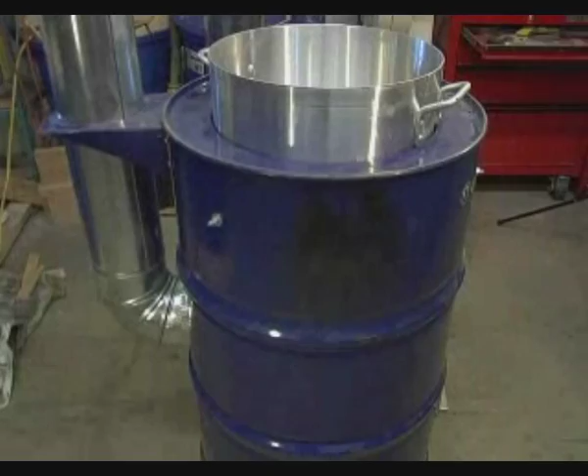This video demonstrates the steps for building an institutional barrel stove. The exact measurements needed for the construction of the stove will depend on the dimensions of your pot. Instructions for calculating dimensions based on different sized pots are included later on in this video.

I'm Damon Ogle, and I am the Research Director at Aprovecho Research Center. This is an institutional barrel stove, and this particular design is made to cook larger quantities of food in orphanages, schools, hospitals, prisons, that sort of thing.

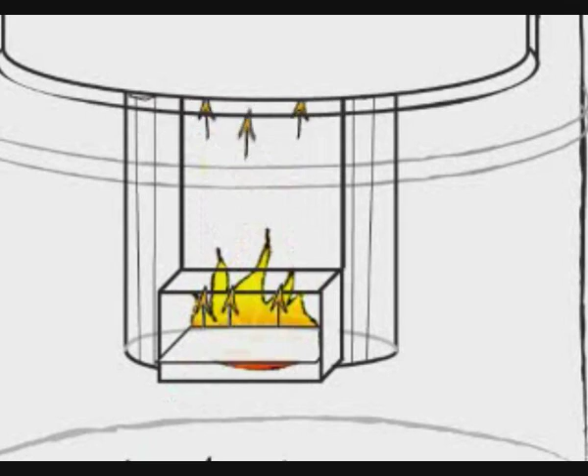These will accommodate a 50-liter to about 100-liter pot. This is a 60-liter pot, and the pot just fits down inside the stove like so. You light a fire in the bottom in the combustion chamber, which cleans up a lot of the hot gases that are being produced.

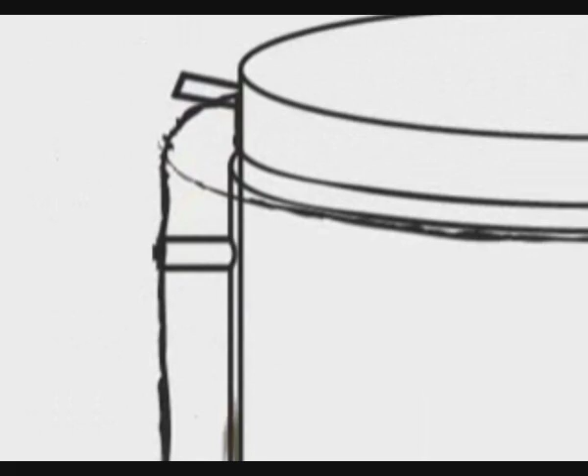The gases come up very close to the outside of the pot, and then they are forced to go back down and exit out the chimney of the stove, which is in this area.

We've made this type of stove before, and we found that they're fairly simple to build and fairly effective, and they can be made with very simple tools on site, basically a couple of barrels and a 5-gallon can.

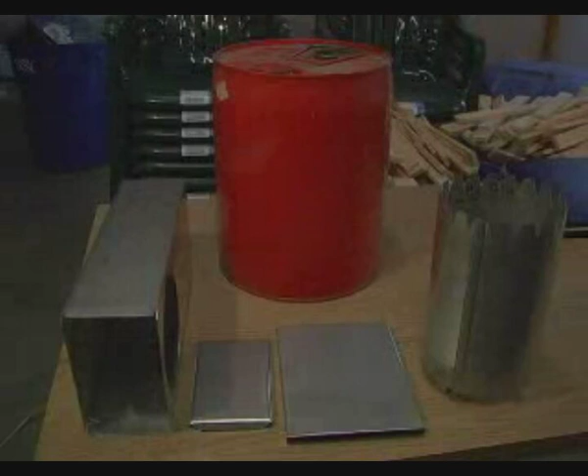The stove being built in this video is made from two 200-liter metal barrels, one 20-liter metal can, a sheet of heat-resistant metal crafted into parts for the fuel magazine, 6-inch stovepipe, a short piece of conduit, and various fasteners.

In order to build an institutional barrel stove sized correctly for your cooking pot, you must first complete this set of calculations. Correctly sizing the internal passageways of the stove is very important.

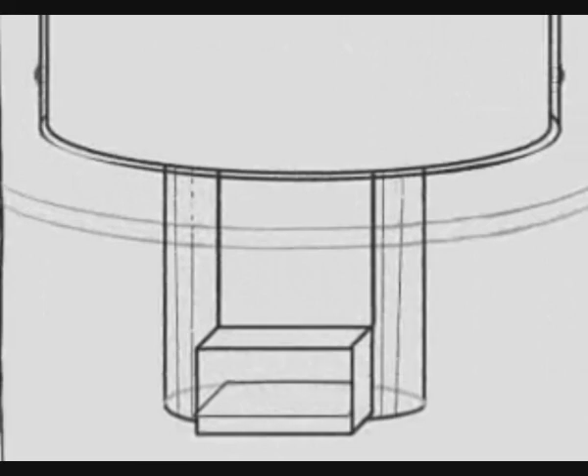If the passageways are too small, the stove will not burn properly and smoke may back out of the fuel entrance. Too large, and heat will not be effectively transferred to the pot and will escape up the chimney, thereby reducing the fuel efficiency of the stove.

A Microsoft Excel file for accurately calculating the dimensions of the stove is available in the Media section of Aprovecho's website, www.aprovecho.org. Determine the diameter of the pot under the handles. Measure the circumference of the pot with a measuring tape.

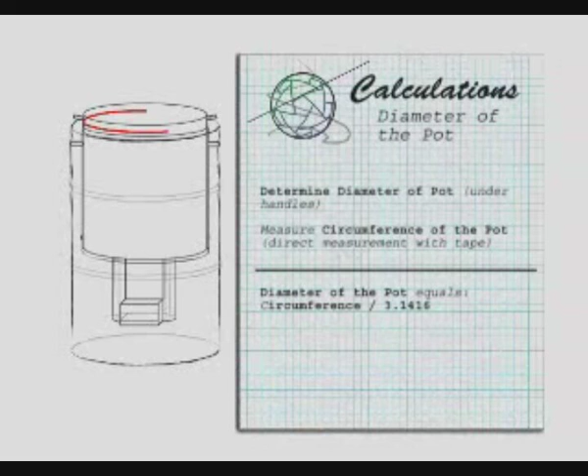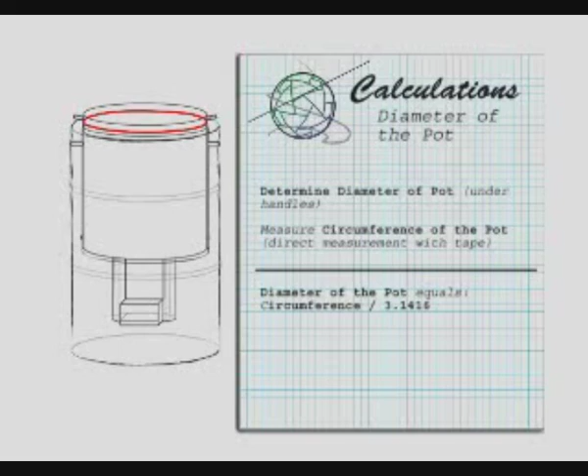Measure the circumference of the pot with a measuring tape. The diameter of the pot equals the circumference divided by 3.1416. Determine the area of the combustion chamber.

Measure the diameter of the riser tube with a measuring tape. The area of the combustion chamber equals 3.1416 times the diameter of the riser tube divided in half, squared.

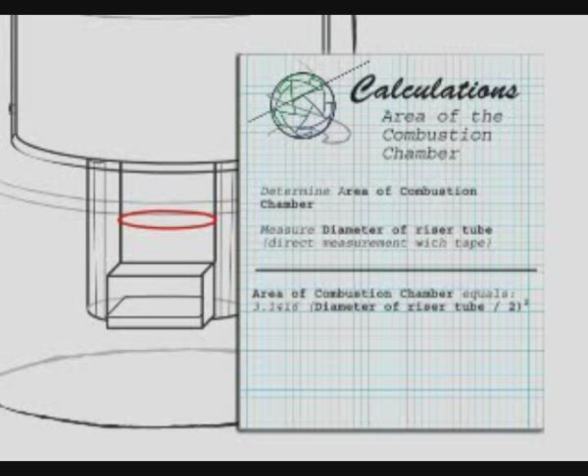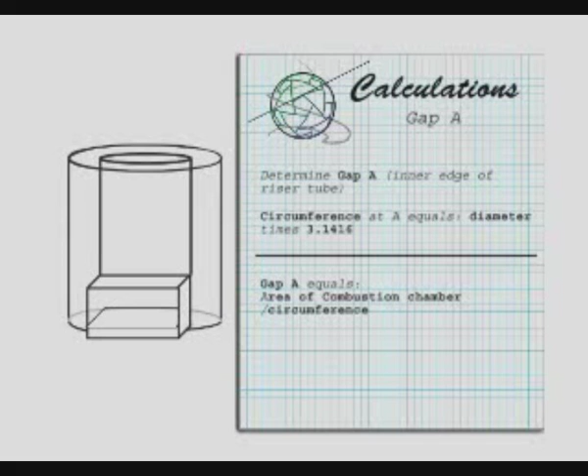Determine gap A, the inner edge of the riser tube. Circumference at A equals the diameter times 3.1416. Gap A equals the area of the combustion chamber divided by the circumference.

Determine gap B, just outside of the combustion chamber can. Measure the diameter just outside of the bucket with a measuring tape. The circumference at B equals diameter times 3.1416. Gap B equals the area of the combustion chamber divided by the circumference at B.

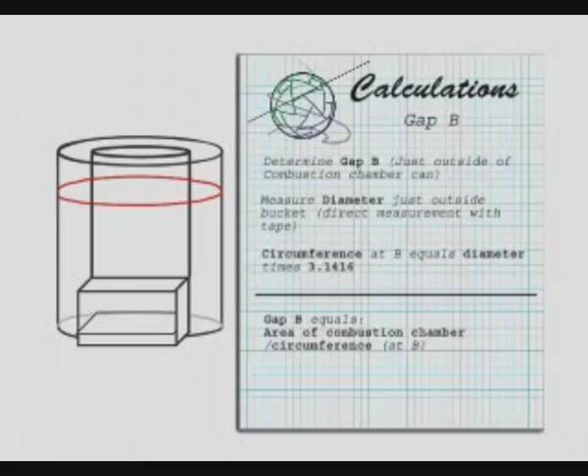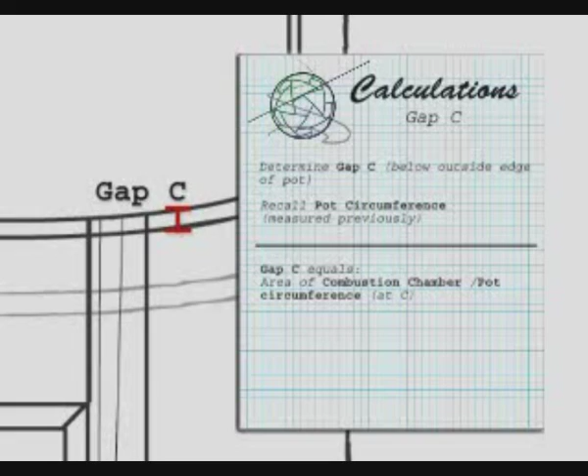Determine gap C, below the outside edge of the pot. Recall the pot circumference. Gap C equals the area of the combustion chamber divided by the pot circumference at C.

Determine gap D, between the outside of the pot and the inside of the skirt. Gap D equals 75% of gap C.

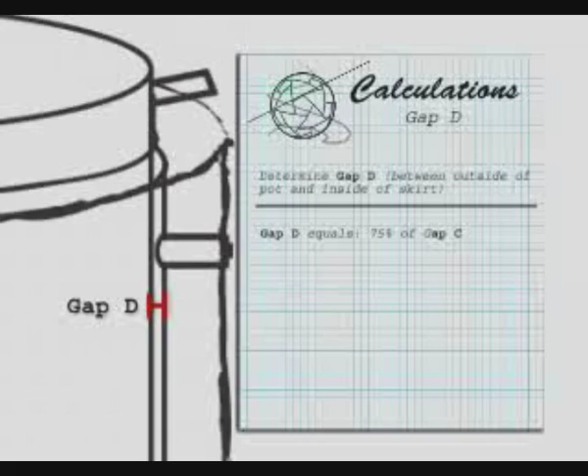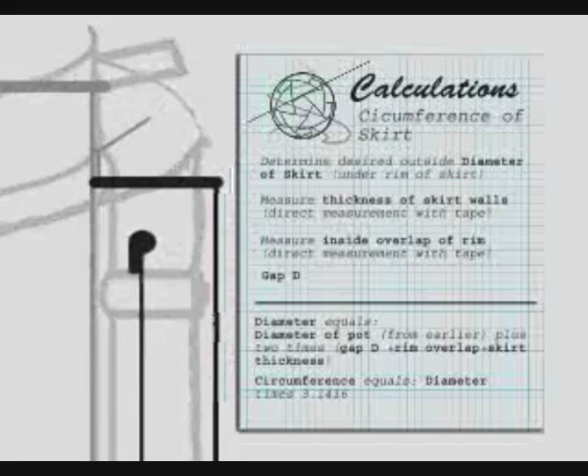Determine the desired outside diameter of the skirt, under the rim of the skirt. Measure the thickness of the skirt walls and measure the inside overlap of the rim. Diameter equals the diameter of the pot plus 2 times gap D plus rim overlap plus skirt thickness.

The circumference equals diameter times 3.1416.

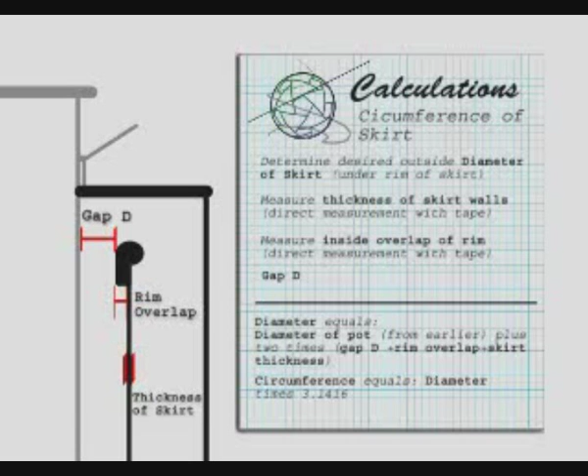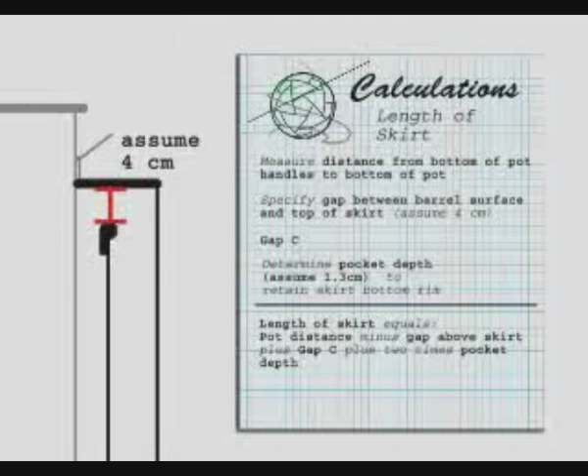Determine the length of the skirt. Measure the distance from the bottom of the pot handles to the bottom of the pot. Specify the gap between the barrel surface and the top of the skirt, assuming 4 centimeters.

Determine the pocket depth to retain the skirt bottom rim. The length of the skirt equals the pot distance minus the gap above the skirt plus gap C plus 2 times the pocket depth.

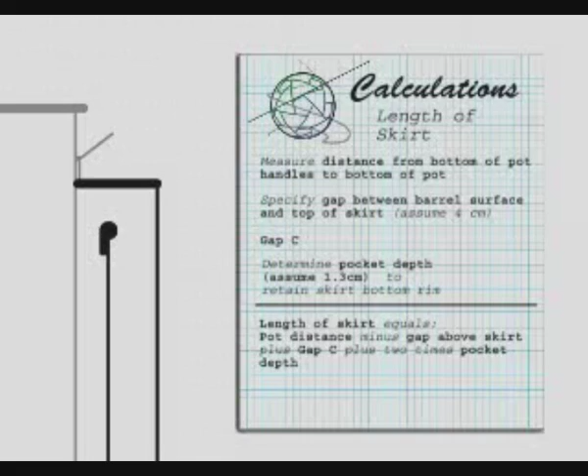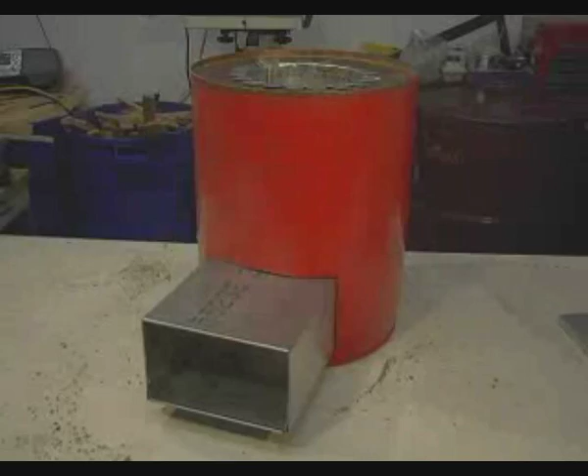The combustion chamber is made of a special heat-resistant metal. Its components are designed to be easily snapped together to form the rocket elbow that is used as the combustion chamber. The bottom of the fuel magazine has already been snapped into place.

The end cap of the combustion chamber is fitted onto the end of the fuel magazine. Lightly tap it into place with a hammer. The corners of the fuel magazine are bent down to lock the end cap into place.

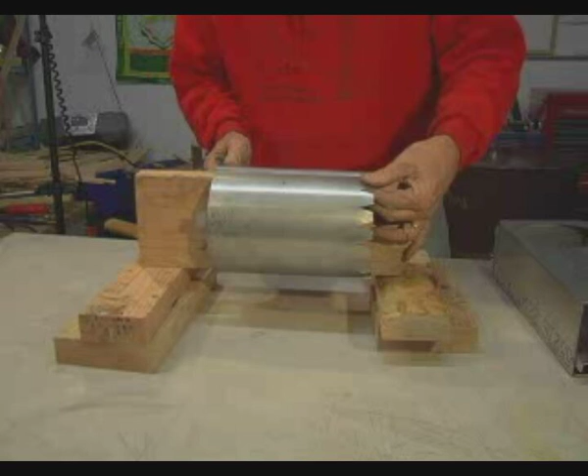The riser section is snapped together. Close the seam using a piece of wood and a hammer. Next, using vice grips, bend the tabs on the top of the riser section outward at 90 degrees.

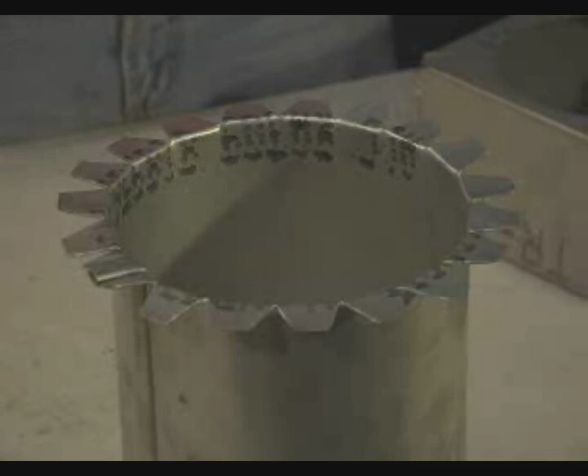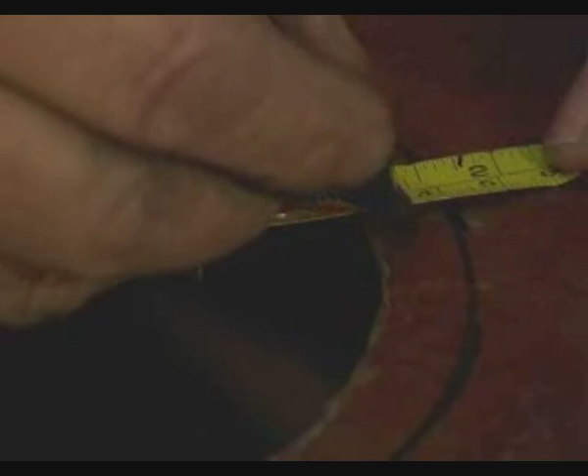Center the assembled riser on the bottom of the 20-liter metal can and draw a line to mark its position. Draw a second circle 1.25 centimeters in from the first circle. Using tin snips, cut along the inner circle.

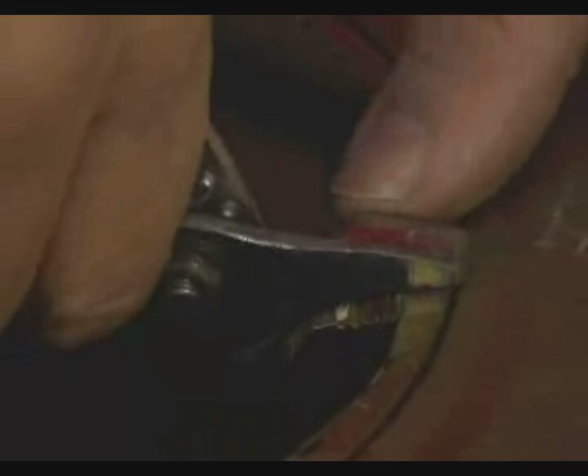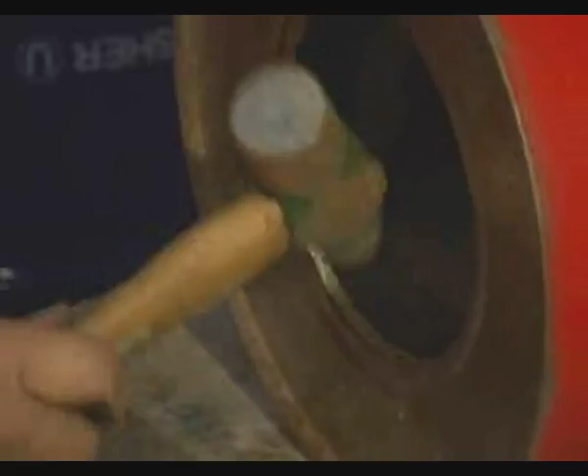Using square-ended pliers, carefully fold down the metal approximately 10 degrees precisely at the outer circle. This causes the metal to bend exactly along the line when struck with a ball-peen hammer. The riser should now fit snugly into the hole in the bottom of the 20-liter can.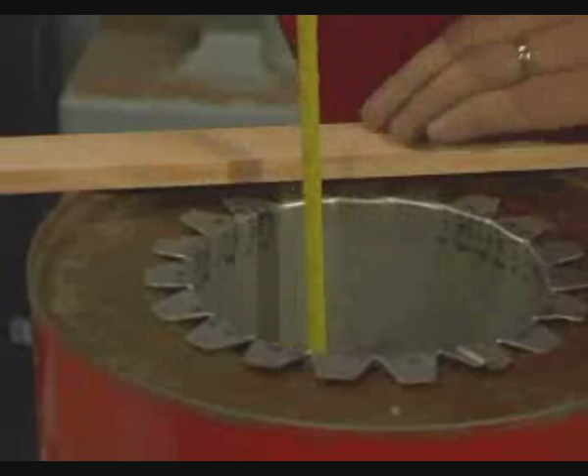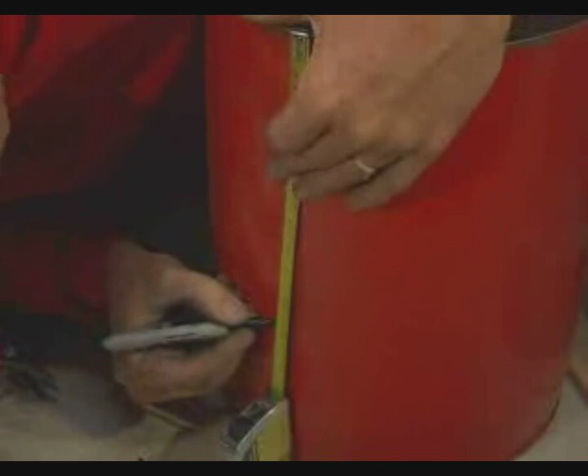Using a straight edge across the bottom rim of the 20-liter can, measure vertically to the bottom of the riser tube. With this measurement, and using the fuel magazine as a template, trace the outline of the fuel magazine on the outside of the 20-liter can.

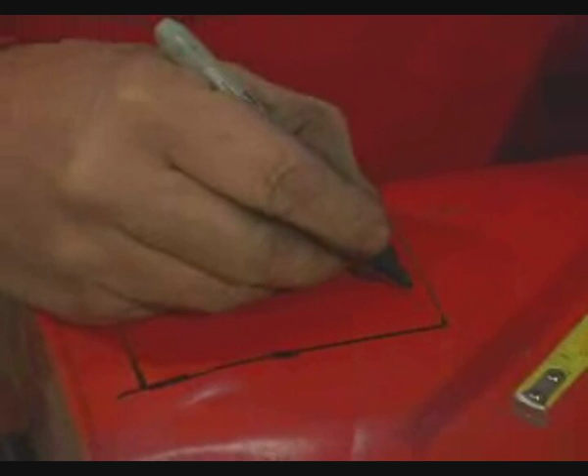A second rectangle that is half a centimeter smaller is drawn on the inside of the first rectangle. Using a punch to start a hole, cut out the inner rectangle. Once the inner rectangle is removed, make four small cuts from the corners in to the outer rectangle.

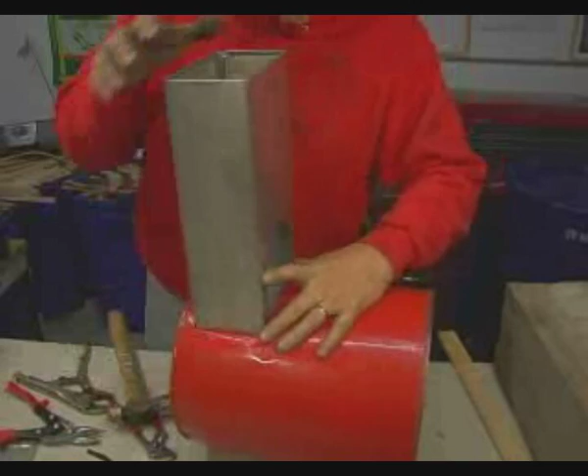Fold the edge at the outer rectangle and bend back the metal by striking with a ball-peen hammer. The corners may need to be squared up to allow for the insertion of the fuel magazine.

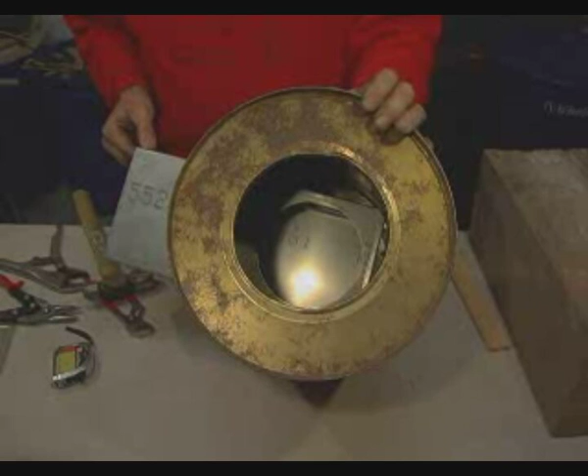Insert the fuel magazine into the hole until the circular hole in the top of the fuel magazine is lined up with the hole at the bottom of the 20-liter can. Insert the riser and lock it into place by bending up the metal tabs securing it to the fuel magazine.

Fill the 20-liter can with a lightweight, insulative material like vermiculite, wood ash, or pumice, being sure that the can is completely full before sealing it. The combustion chamber is now complete.

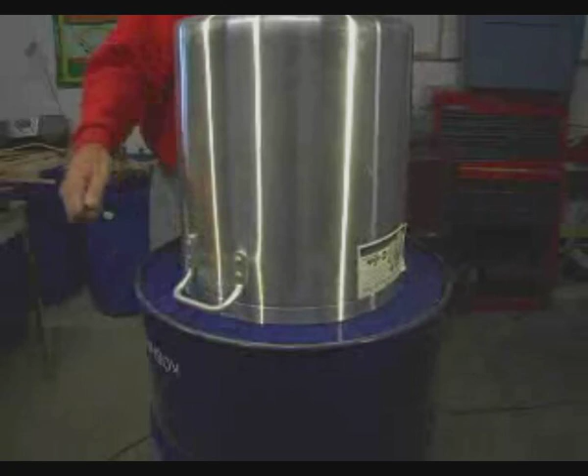With the 200-liter barrel and the pot upside down, mark the outline of the pot centered on the barrel. Mark a second line 2 centimeters inside of the first.

Using a punch, start a hole on the inner line and cut out the inner circle using a hatchet and a hammer. Save the inner piece that was cut out for use as a chimney support later.

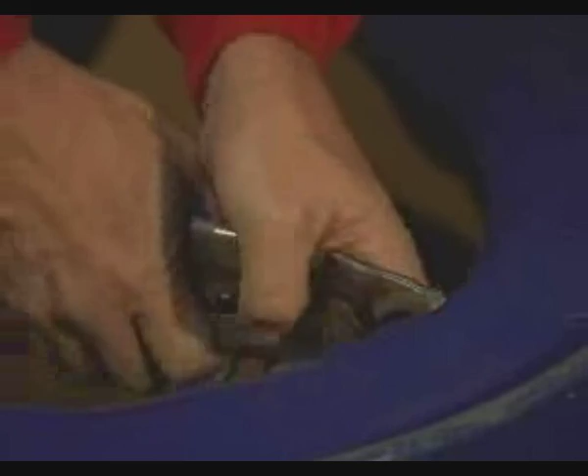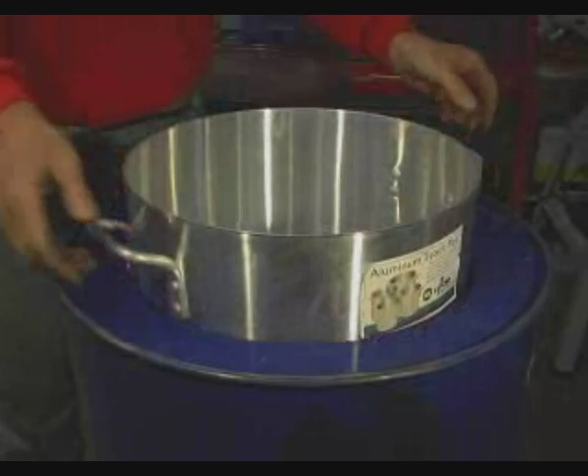Bend down the edge slightly, exactly at the outer circle. Starting from the inside, bend the inner lip in and down until the pot fits exactly in the hole, all the way down to its handles. Any gaps created between the pot and the hole may allow for smoke to escape from the stove.

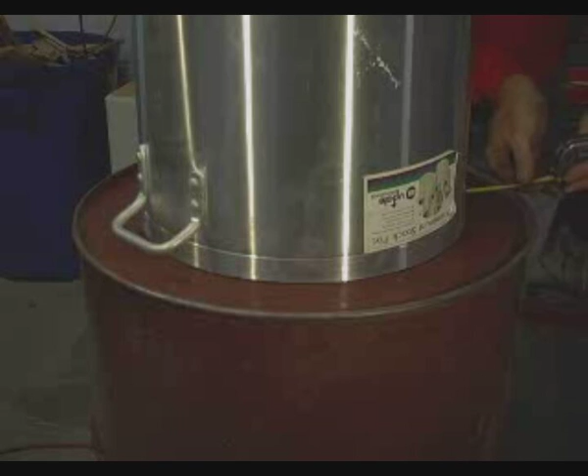A second barrel is now used to construct the inner skirt. Center the pot upside down on top of the second 200-liter barrel and draw a line around the pot. Now, center the combustion chamber upside down on the barrel and draw an outline.

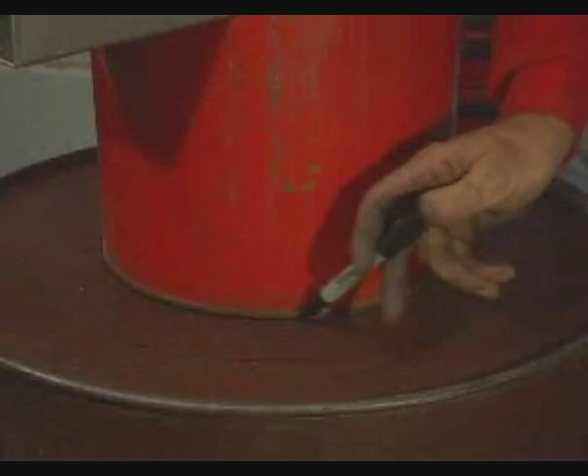Mark a line 0.75 centimeters in from the inner circle to determine the bend point. Determine the inner rim height, which equals gap A minus gap B, and mark another line at this distance inside of the bend line. Cut out the inner circle.

Using pliers, crimp downward at the bend line. Use a ball-peen hammer to pound the inner rim in at 90 degrees.

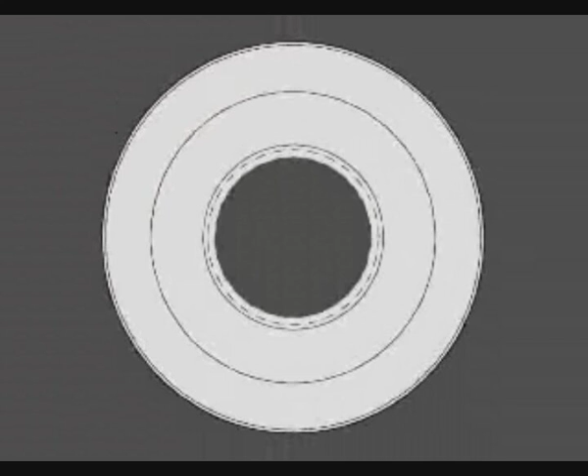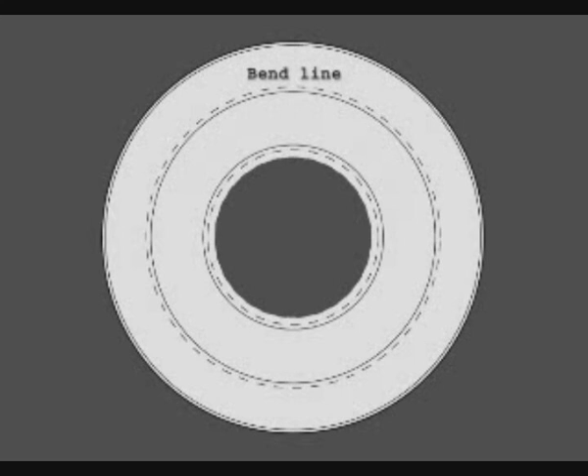From the line drawn around the circumference of the pot, mark a second line using the calculation for gap D as the distance outward from the pot circumference. This will be a bend line. Draw a third line equal to the calculation for the pocket depth outside of the bend line.

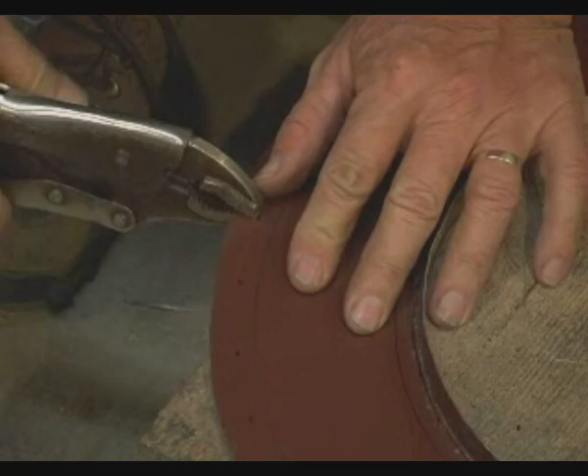Cut the entire top out of the barrel. Cut down to the outermost line. Crimp downward at the bend line to a 90-degree angle. Use a ball-peen hammer to pound the inner rim at 90 degrees. This completes the bottom of the inner skirt.

Cut out the top of the second 200-liter barrel and set the top aside for use later. Using the calculated length of skirt, measure down from the top of the barrel and mark a line. Cut around the barrel using a chisel and hammer.

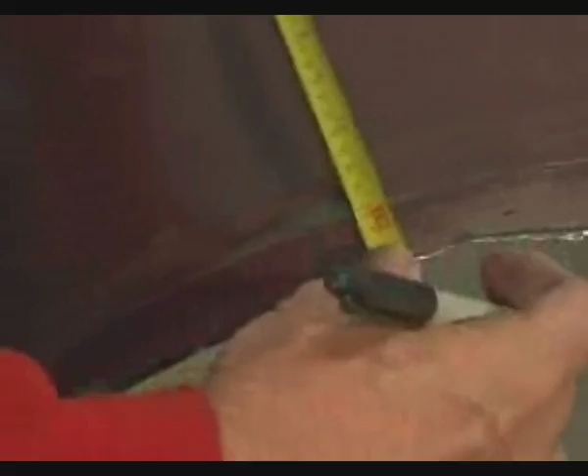Hammer flat the groove in the barrel. Mark a line around the barrel 1.3 centimeters up from the cut. This is the pocket depth and bend line.

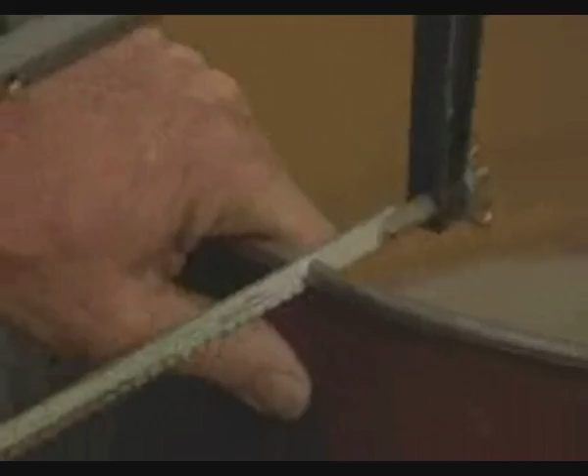With a hacksaw, make a cut through the rim of the barrel. Draw a straight line downward from this point.

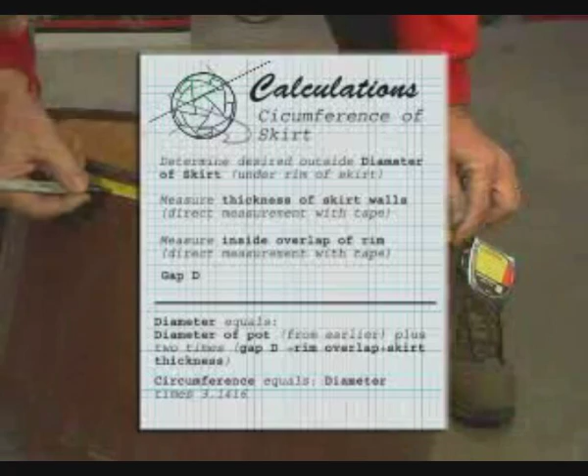Using the calculated circumference of the skirt, measure from the cut around the barrel just under the rim and mark this distance. Draw a straight line down the side of the barrel, using the hacksaw to cut through the rim of the barrel at this point. It is now necessary to make an overlapping flap to connect the edges of the skirt at the proper distance.

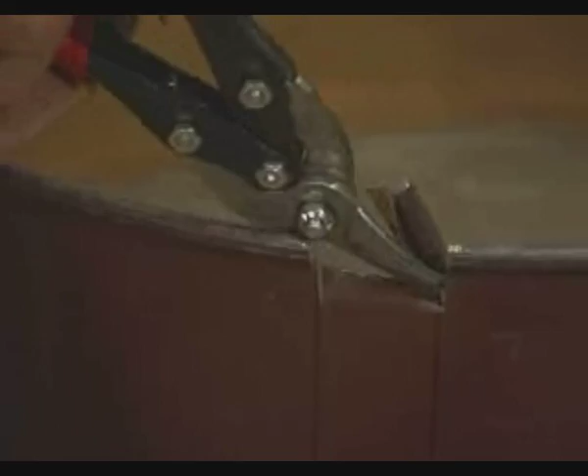From the first cut in the rim, draw a line 5 centimeters towards the edge to be connected. Cut through the rim again at this point, and remove the 5 centimeter section of the rim. Cut along the 5 centimeter line, creating the connecting flap.

Hammer smooth and remove the 5 centimeter rectangle at the bottom. Cut along the other line to create the opposite edge of the skirt.

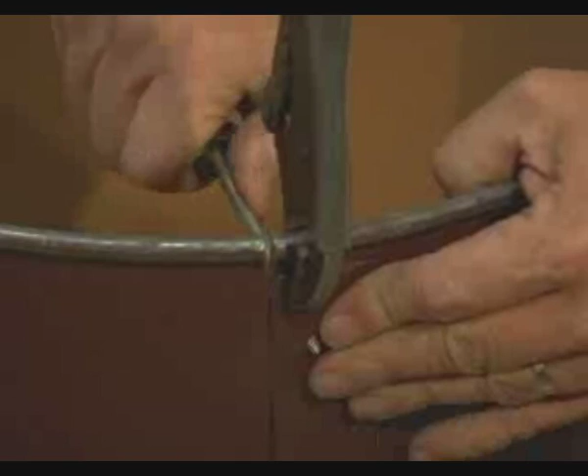Join the two edges together so that the hacksaw cuts in the rim are adjacent to each other and clamp into place. Punch a hole just below the rim and secure with a screw or pop rivet.

Align the bottom edge with the marked lines and punch a hole at least 5 centimeters up from the bottom of the skirt. Secure with a fastener.

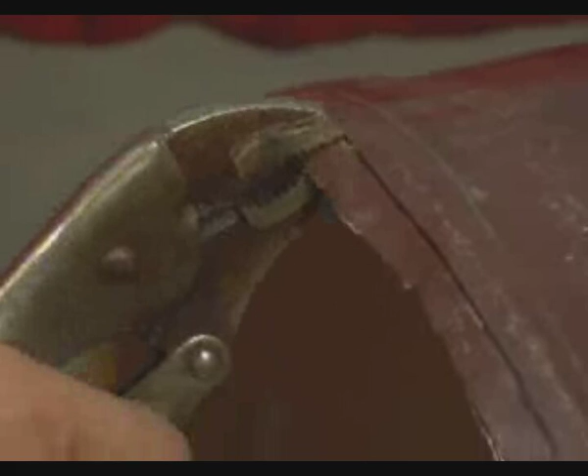Bend the bottom edge of the skirt inward along the marked line to create a 45-degree pocket. Don't try to achieve this step in just one pass. Gradually work around the barrel, bending a little bit at a time.

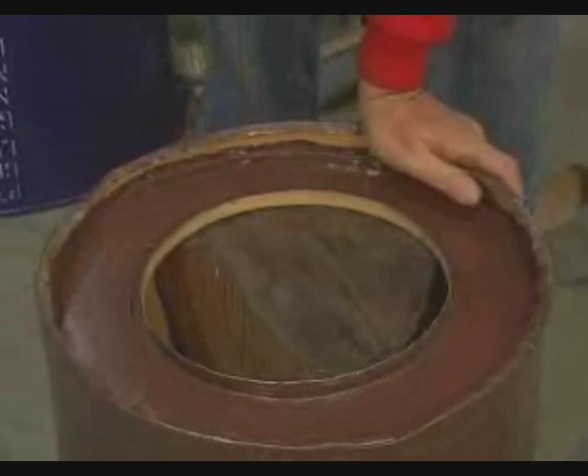Insert the skirt bottom inside of the skirt barrel and rotate into place. The outer bend on the skirt bottom locks into the pocket on the skirt barrel.

Place the assembly upside down on a block of wood and use a hammer and vice grips to lock the pieces together. Check to make sure the rim of the skirt assembly is as nearly round as possible. Some adjustments may be required.

Punch 4 equidistant holes in the bottom of the skirt assembly, just outside of the combustion chamber rim.

Cut 4 spacer tubes to the proper length to ensure that the head of the bolt is exactly the measurement for gap B above the inside bottom of the skirt assembly. Secure the 4 bolts and spacers into place.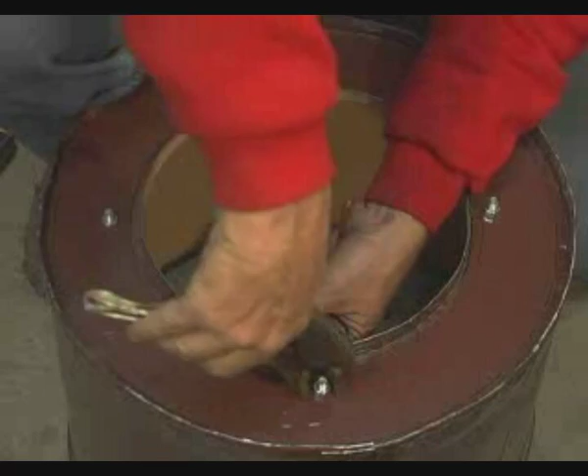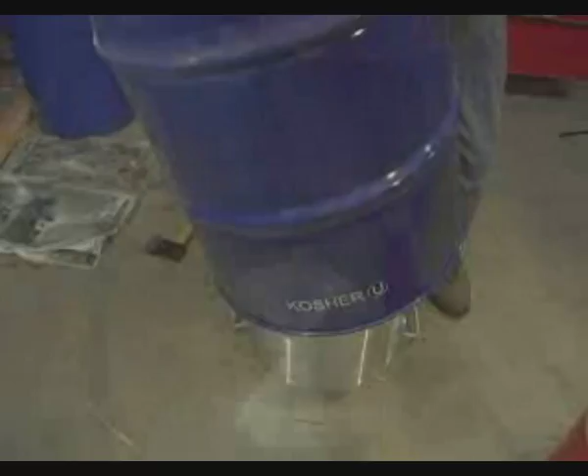With the pot upside down on the ground, place the main barrel over the pot and lower the skirt assembly onto the pot so that the pot is snug against the spacer bolts at the bottom of the skirt assembly.

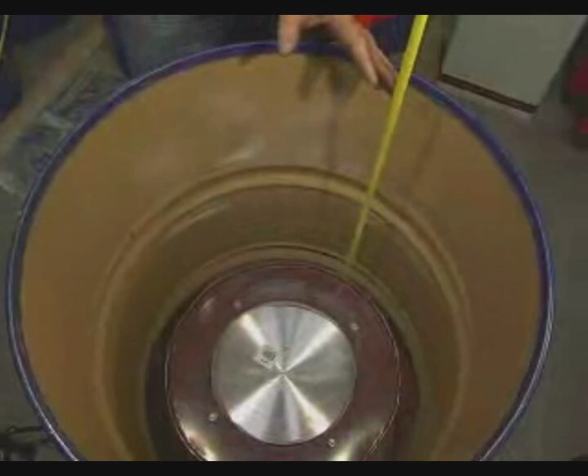Measure the distance from the rim of the skirt assembly to the rim of the main barrel. Using this measurement, subtract 3 centimeters and measure down from the rim on the outside of the main barrel and make a mark.

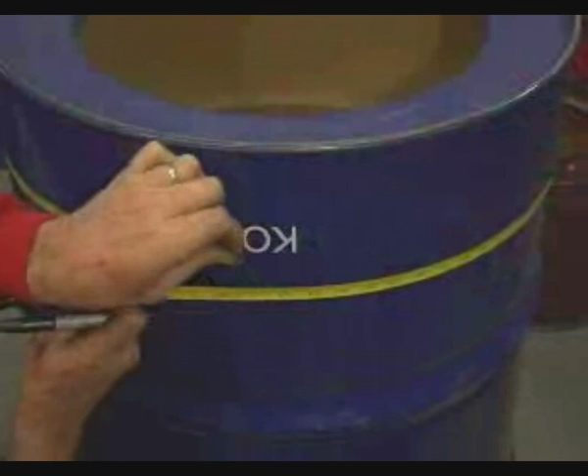Remove the skirt assembly and flip the main barrel and pot upright. Make 3 equidistant holes around the outside of the barrel at the previously determined height. Make 3 corresponding equidistant holes 3 centimeters below the rim of the skirt assembly.

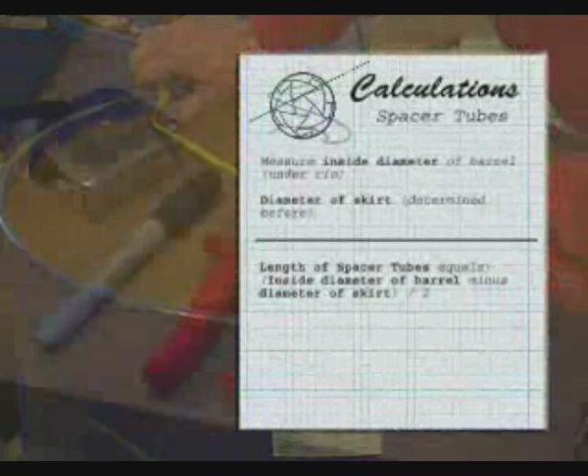Measure the inside of the barrel and subtract the calculated diameter of the skirt. Divide the result by 2 and use the resulting measurement to cut 3 spacer tubes of this length.

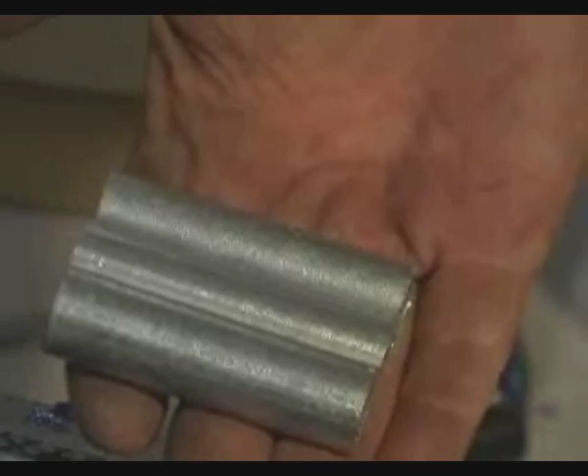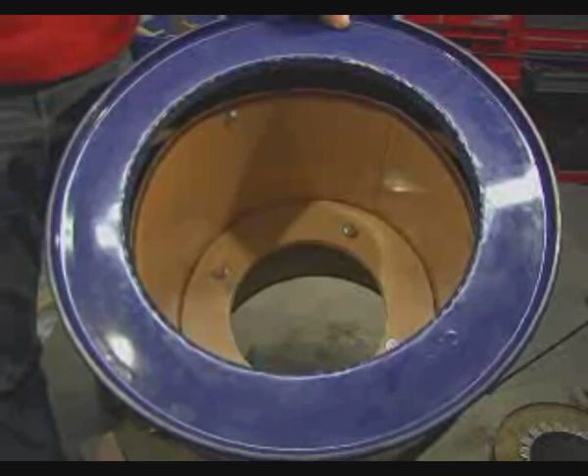Place the skirt assembly inside of the main barrel and install long bolts using the spacer tubes in between the skirt assembly and the main barrel. Secure these into place. Punch 3 equidistant holes in the sides of the skirt assembly 5 centimeters above the bottom.

Place enough flat washers under the bolt head so that it protrudes the measurement of gap D from the inside of the skirt. Secure these bolts into place.

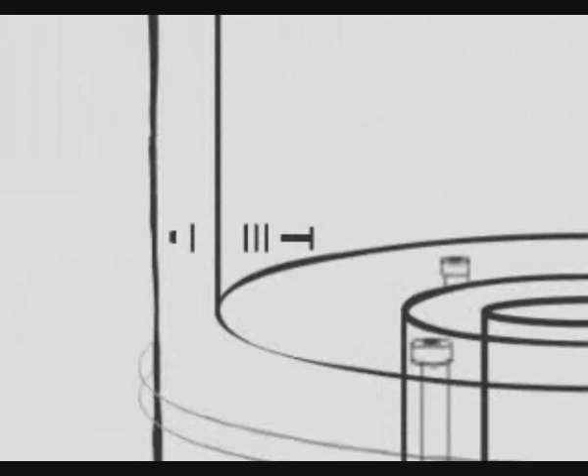These bolts are used to ensure correct placement of the cooking pot in the stove. They do not go all of the way through to the outer barrel.

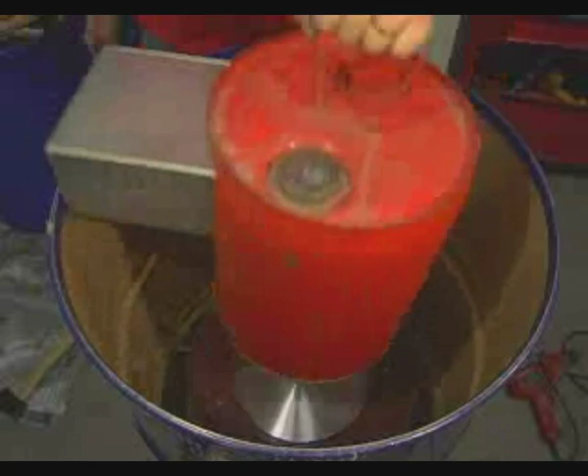Place the assembled stove upside down on top of the pot. Place the combustion chamber upside down on the skirt. Mark a rectangle on the outside of the barrel corresponding to the placement of the fuel magazine.

Remove the combustion chamber and mark a second rectangle 8 millimeters to the inside of the first. Cut out the inner rectangle and make small cuts from the inner corners to the corners of the outer rectangle.

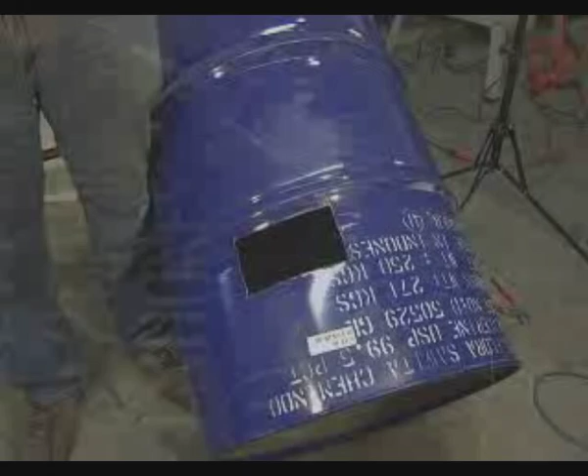Bend along the remaining line as before. Square the corners to accommodate the fuel magazine. Replace the combustion chamber, inserting the fuel magazine through the rectangular hole.

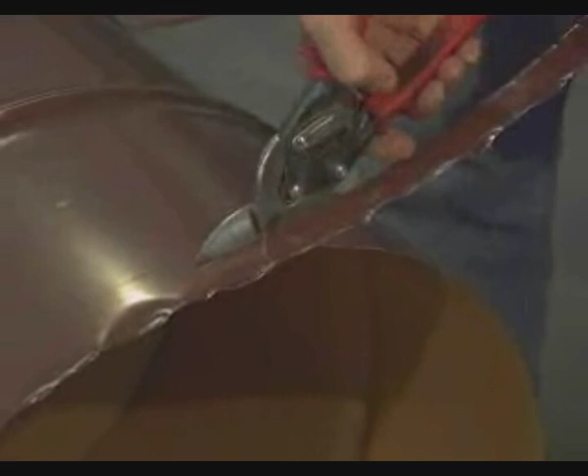Cut 2 3-centimeter wide straps from the remaining half of the 200-liter barrel. Fold over the ends of the straps and punch a hole wide enough to accommodate the bolts at the bottom of the skirt assembly. Use the 2 straps to secure the combustion chamber to the bottom of the skirt assembly.

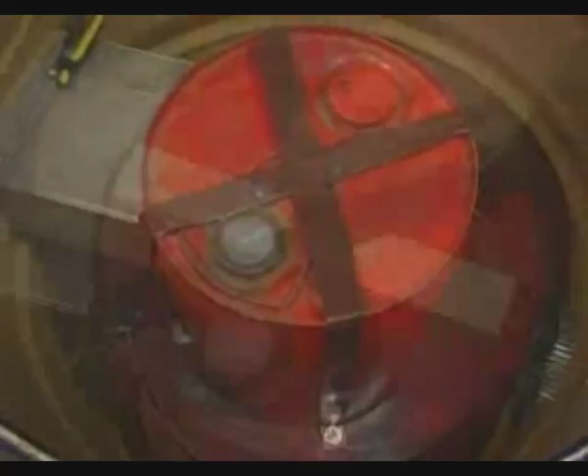Punch a hole at the intersection of the straps and secure with the screw.

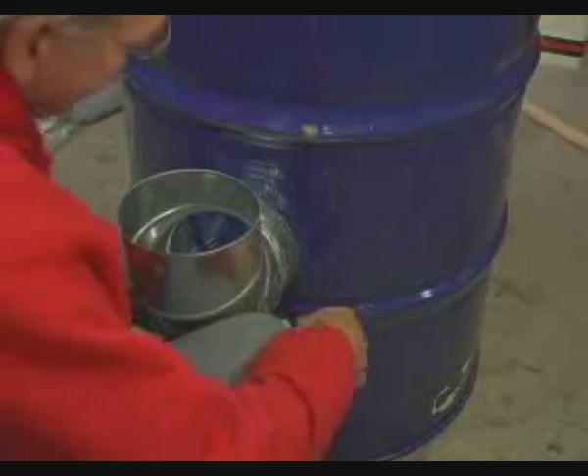Secure the shelf into the fuel magazine. With the chimney elbow, trace a circle on the back of the stove opposite the fuel magazine and below the bottom of the skirt assembly.

Cut a hole and trim to fit as closely as possible. Craft a chimney brace from the cut-out top of the barrel and secure into place.